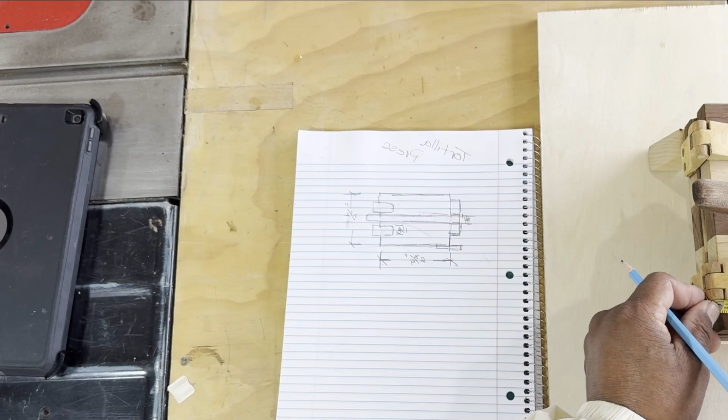The hinge is 2.5, so from this point to this point is 2 1/2. This is hard to see, you'll see it on the drawing once I get it onto the computer. We're going to go in about 3/4, so from this point to this point is 3/4 of an inch.

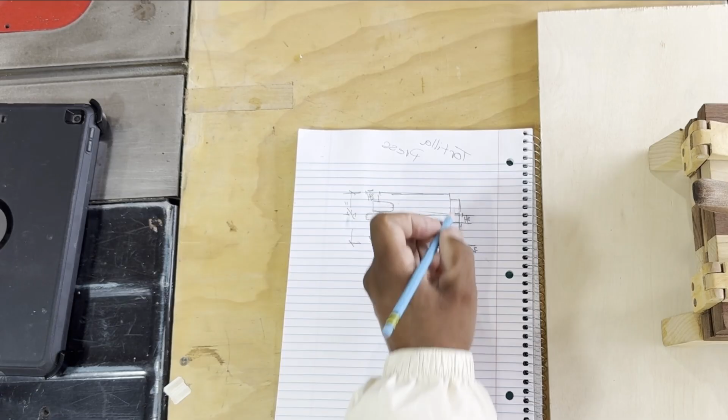And I'm going to draw the kind of side view of it. This little handle is 3 3/4, so from here to here is 3 3/4, and that's about a 1/2 inch thick, less, probably 3/8, so we'll say 3/8. This is 3/4.

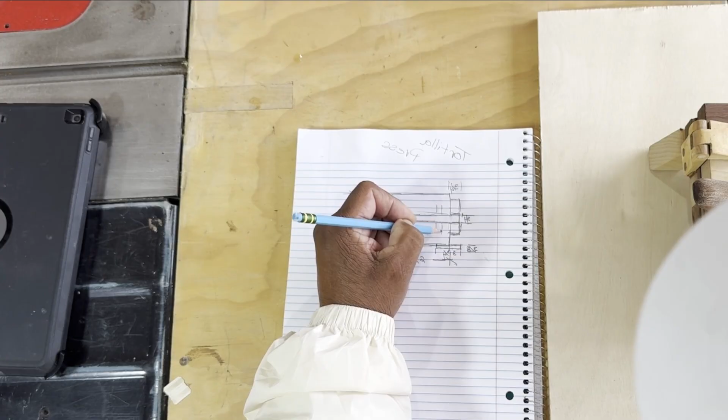And then it has this little kind of bar that goes here, and that's just to give some leverage.

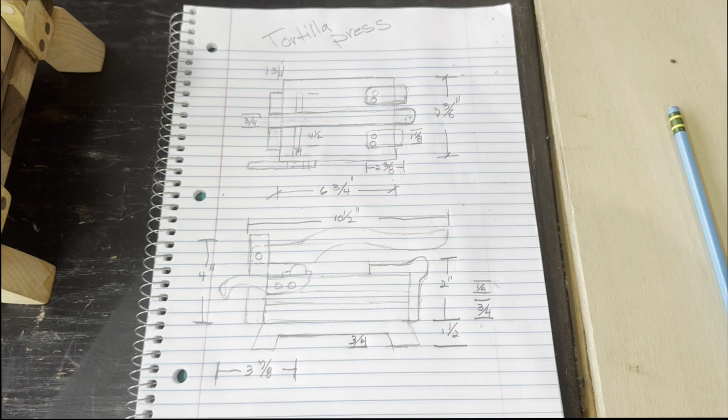So this is a sketch of the tortilla press. Now what I used to tell my students is that you have to be able to sketch out the project you want to build, to get a rough idea of what you're doing, and then transfer your sketch onto a computer-aided drafting program and do a finished shop drawing of it.

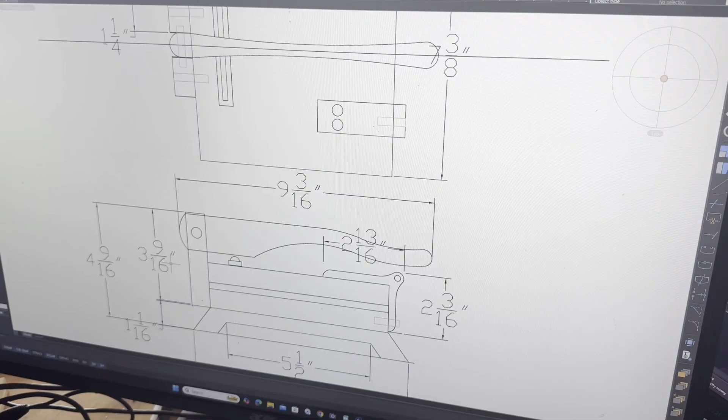So this was the process. This is my sketch of the tortilla press. Okay, so I wanted to record this. I tried a lot of ways to get it recorded, and I did this whole drawing off of my sketch.

The problem I had though was I used to be able to do this on PowerPoint, but I don't have PowerPoint anymore. I'm just using Google Slides, and I used to be able to record on Google Slides or PowerPoint and then download that recording as an MP3 file. For some reason I must have forgotten how to do it, or I don't know, I couldn't figure it out.

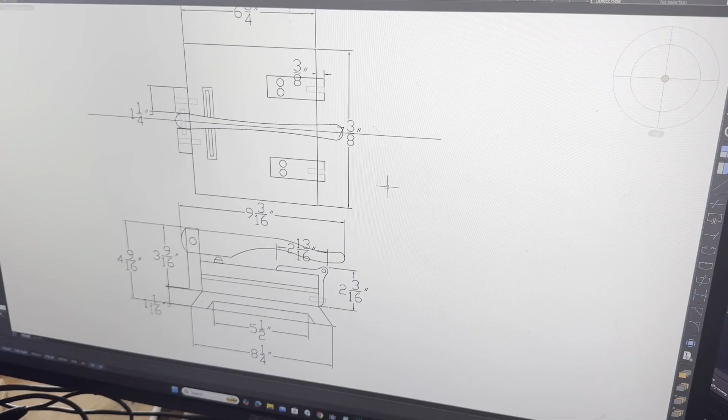So this was already done, but there's some things I've got to add to it and do the front. So this is the top, this is the side view, and then the front view, and it's kind of backwards. It usually goes front, side, top. So I'm probably going to move this over and then draw the front view the way I used to tell my students to do it.

Most of this is going to be on NanoCAD, which I'm using now because Autodesk is too expensive for me to use at home. This ends up costing me about $400 for a NanoCAD subscription, and I think it's worth it because I can use all my DWG files on NanoCAD. It's an online-based program. I'm not sponsored by them, I'm just giving out information in case anybody would like to use this program.

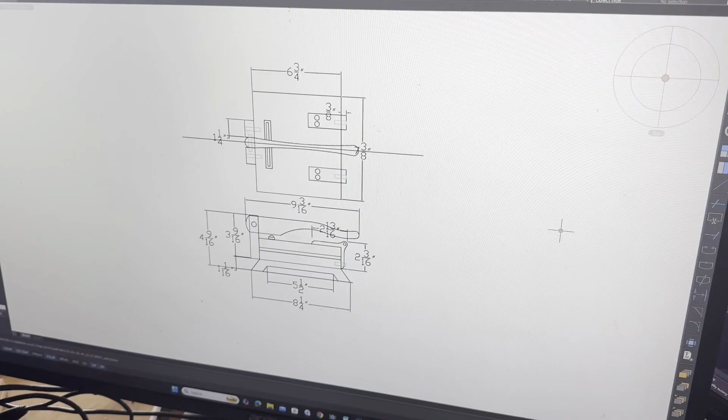I'll try to adjust this a little bit better so you can see the whole screen. There we go, this way. There we go, that's better.

So I'm going to go ahead and make the corrections I need to make, drawing the front side, and the rest of this is going to be moving really fast. I'm going to break it up once I get the video down. So here we go.

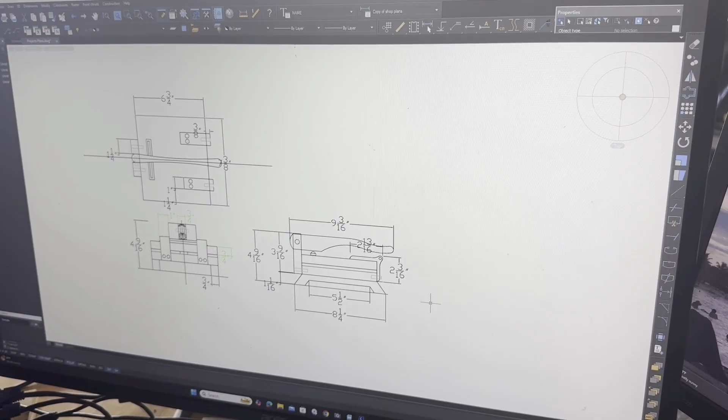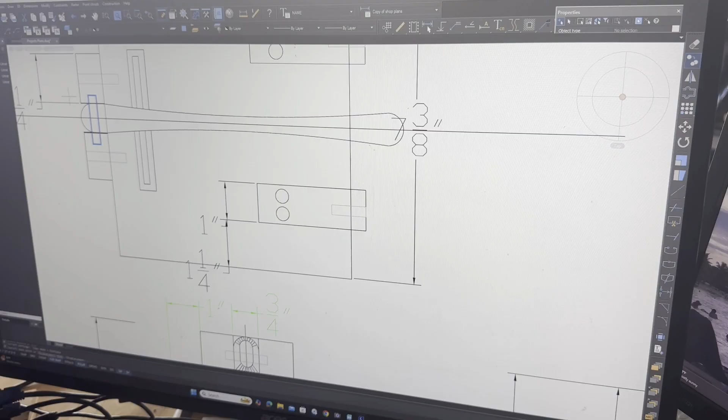These lighter areas right here are just the dowels that hold the different parts in. There should be one more over here, so let me just stick that in there. You guys can see it. Let me make it a little shorter.

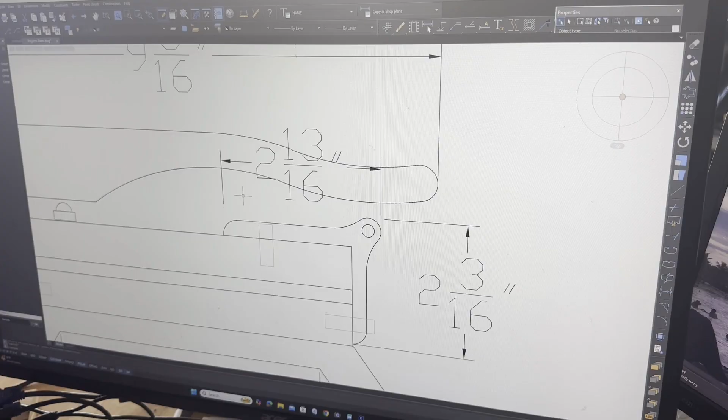Okay, so these are dowels that hold the hinges in. The other thing I forgot to do, I'll do that now. Let's see, the best way to do this would be to just copy it.

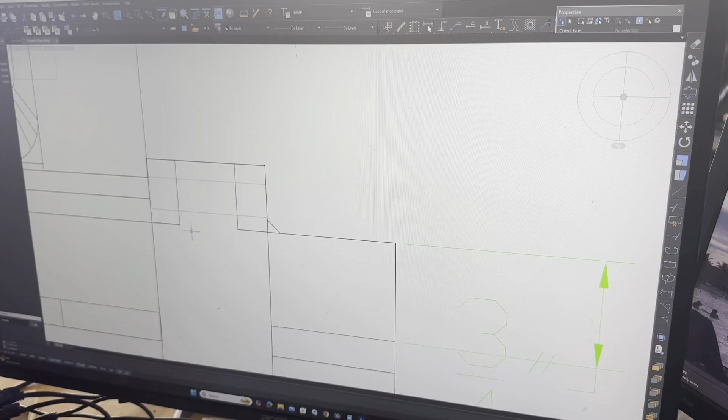Okay, this is showing the hinge, and it has a dowel going through it. Again, these are wooden dowels, so there's no screws, no metal whatsoever on this tortilla press.

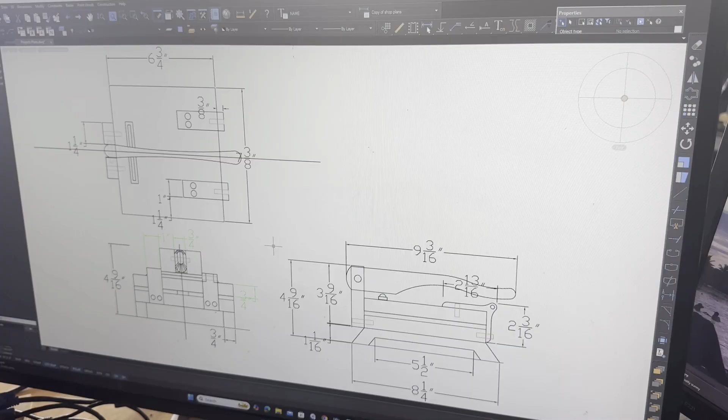All right, so there's the drawing off my sketch and the beginning of the tortilla press. Now what I'm going to do next is build it off of this plan, so I'm kind of reverse engineering this whole thing, because I built the original tortilla press without a plan.

All right, just so you can see it, I bought this little monitor, and it actually shows me what my camera is looking at. I don't know if you can see it in the video, but there it is. So that I can set up shots.

I was trying to use my iPad. I just couldn't get it to work, even though I saw some videos online where that's been done. So the other thing I did was I bought this external mic for my iPhone.

I like the case. It's easy to put away, and I'm sure it's not going to get messed up. So these are my new purchases: the external monitor, my new mic. I'm going to hook that up really quick so we can see the difference between the sound of the mic and the sound of the iPhone without the mic.

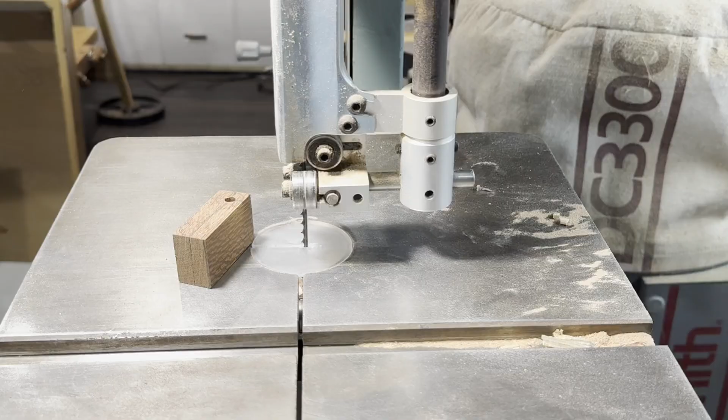Okay, I have a rough drawing of what I'm going to cut out. Now this is quite scary because your hands are really close to the bandsaw, so you really got to be careful.

Normally what I'm going to do is push it through to a point, then try to grab it from the back and make that cut. So it might even be better if I go this way, that way I have something to grab onto. Here we go.

I tried cutting this on the scroll saw, but this material or this wood is just really, really dense.

I figured out that if I'm going to make these exactly the same, I need to line up these holes that I drilled on the pieces so that I could draw those lines, and they'll be right where they need to be.